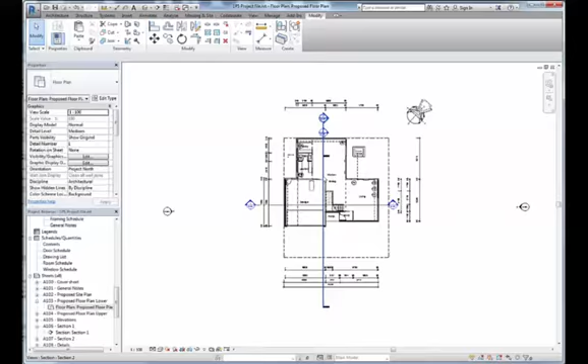Okay, just getting started on sections. I've already made a start, but I'll just run through it.

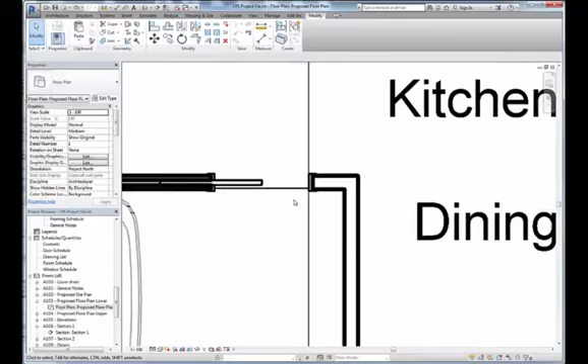You can see where we've got section 1 cut through here, running all the way through the stairwell, through the garage, so we can see this wall. There's a box gutter here, right through to the other end, and I've just skimmed right through that cavity sliding door there and through the garage, just cut through that area as well.

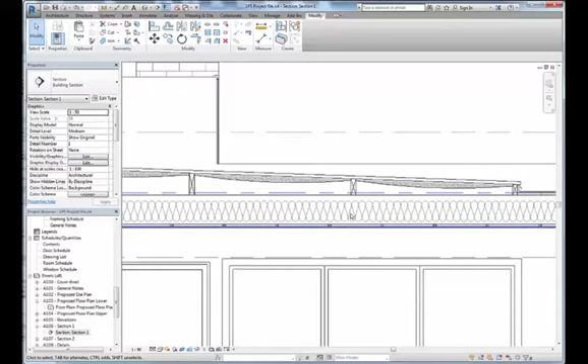So section 1, I've started some detailing here. I'll just switch that back to a thin line. Just started putting all these bits and pieces in. You can see here, it's probably easier to see the stuff in closer detail in the actual detail, so we'll go there in a moment.

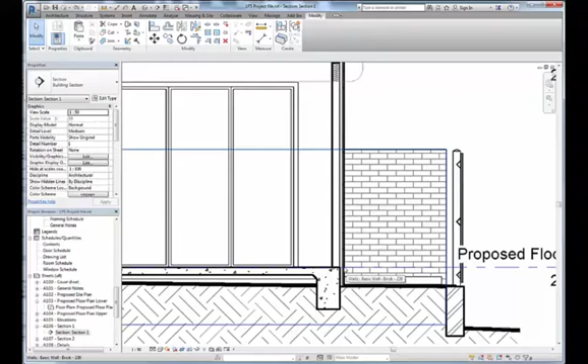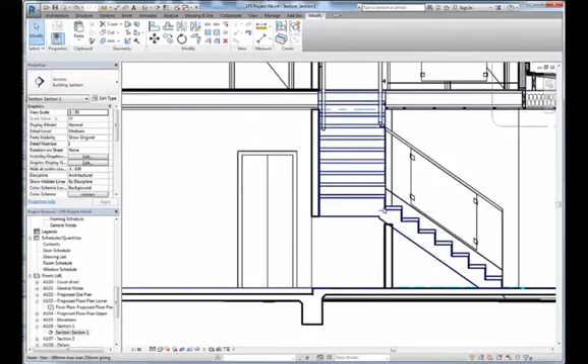I've just started mapping things, cutting and pasting backwards and forwards between my detail and my section. So I would put my bottom plate, my nogging, my top plate, top of the parapet wall, start mapping all these bits and pieces. Rafter, the insulation, some extra lines and bits and pieces going on in the floor joists.

There's another wall, so it'll need plates, insulation, all of those things. There's another, floor to garage, and the from bedroom down to the garage will need to be insulated as well. There's trusses, box gutters. So these are all just detail items, and just using detail lines to go all the way through. I'll just tag that

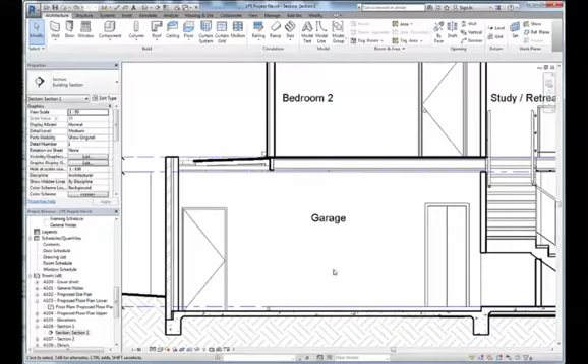room. Create similar. There it is. Just tagging the area. So it's just about drawing all that information in and starting to do the documentation as we spoke of in the presentation.

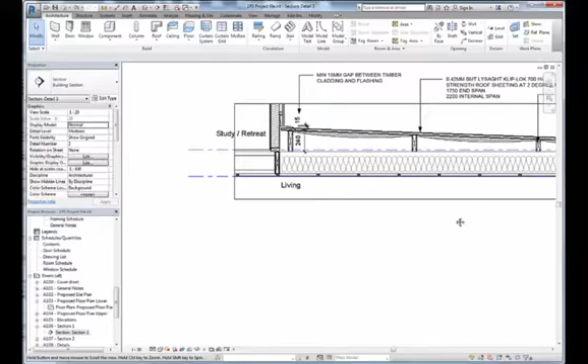So just having a quick look at the detail. I've started putting this together. Probably the best option I can come up with as a quick fix for this roof sitting over the living area is to put the rafters in flat.

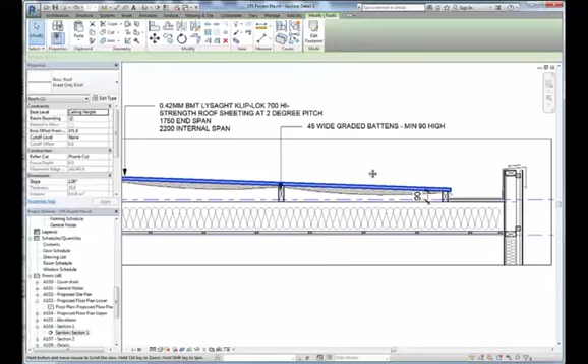Purely horizontal, and then the slope of the roof will be determined by what we call graded battens. So the first batten across the top here is sitting at 90mm, and then we just increase the size of each of these battens over the top to create the fall.

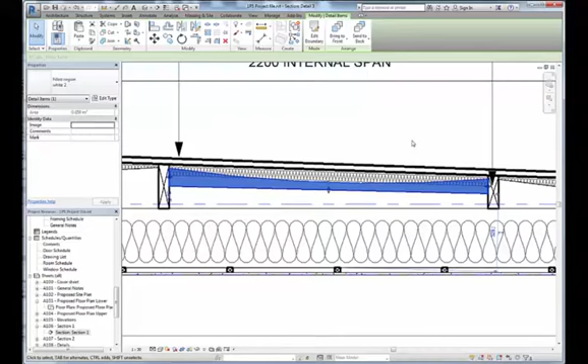The sloping insulation graphic that I've got happening there, you can see that it's just a piece of 40mm wide insulation with a little bit of solid white filled region representing the curve arc of the sarking. It's like an anticon, which is an insulated sarking, and you can see there that it actually hangs over into

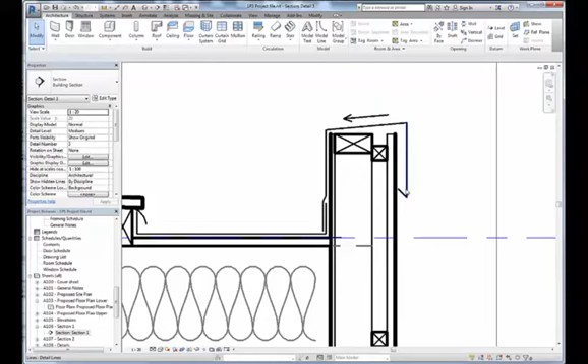the box gutter. We've got the gutter board sitting underneath. We've got flashings going over. You can see that the flashing slopes inwards, so when it's raining and it's wet, the dribbles and the moisture then travel down into the box gutter, and very importantly I've got that drip on that flashing as well, so any water that runs down doesn't proceed to dribble down the wall and leave stains, things like that. We try to put a hefty flashing on so that it doesn't dribble.

I've added these battens. I've used some invisible lines using modify and line work. There should be an invisible line option here if you want to hide different lines in different places. If they're modelled in place, you need to hide a line, then we can use the invisible lines to get rid of those lines. So I'll just undo that so it doesn't mess with me too much.

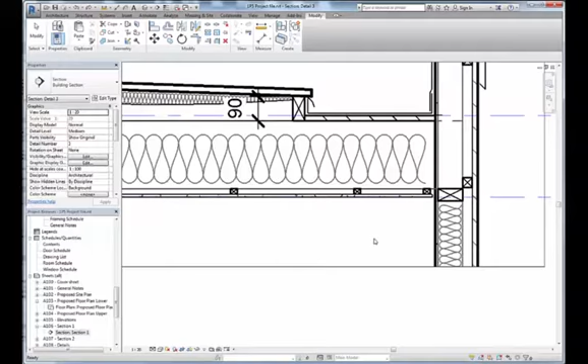So I'm just pulling this apart and I'm just copying backwards and forwards between the section and the details. It's probably need to keep going with the section first before we go anywhere. Draw those rafters in place.

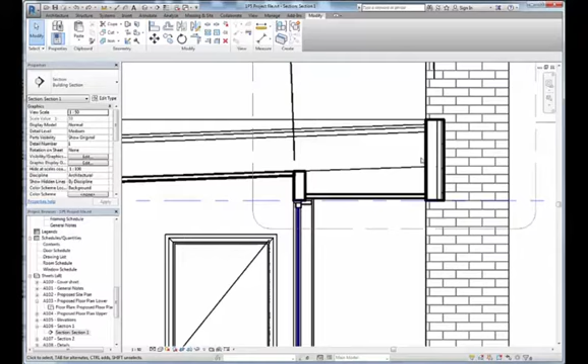This little fascia out here will be top plate, bottom plate, studs in there, some battens so that we can put our cladding on there. We've got eave linings probably going to be supported from that rafter. We've got a lintel sitting in here, hopefully it'll fit in that space, and battens underneath.

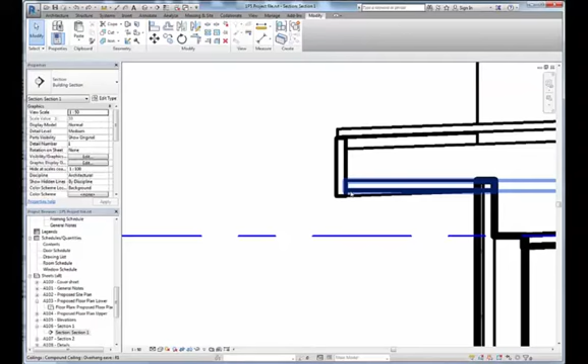Top plate, bottom plate, nogging, top plate, bottom plate, nogging, insulation, battens for the cladding, notations all the way around. We need a gutter on here, and the fascia and the eave linings needs to be noted, so notations all the way through.

You can notate the parapet wall behind or something like that. So lots to do, lots to specify and draw. So I hope that helps just to get started.

As we saw in the previous video, how I created these views here is purely just by drawing up this section, all the details in there as we discussed. In the section I will then duplicate with detail, and with the crop view turned on we shrink it down. This is how we can create our views

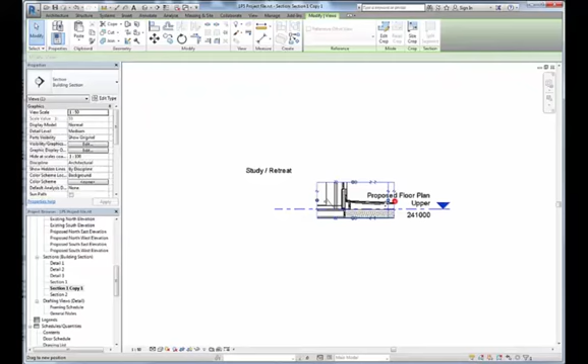for detailing. So if we need to pull out a detail of that area there, we can do that. Change the scale 1 to 10 if it's going to be a particularly big one. Save it as a different name, and then that becomes the detail drawing, which inherits all of the drawn items in there. These are just detail lines and filled regions and bits and pieces.

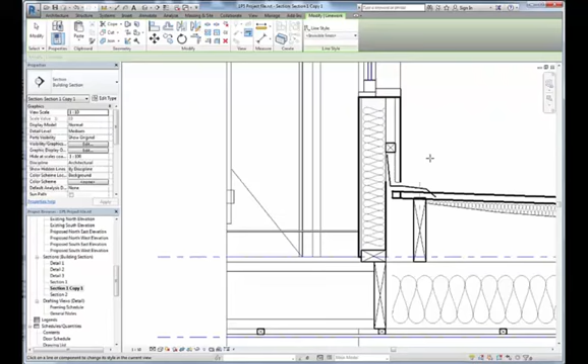I've lost some of the editing, so I've used some invisible lines here, let's cancel that. Line work, invisible lines on the bottom of where this wall sits, just so that we can see where the flashing is sitting. The roof didn't quite go long enough, so I've just hit that with the invisible line and drew some additional lines on there. They were 0.35 pen, just to extend the roof to show exactly where I want it to sit.

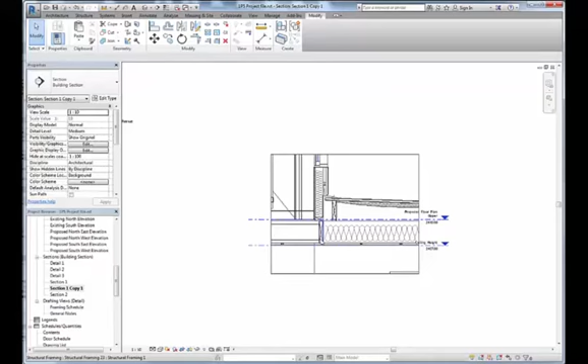I'm not going to alter the modelling of that, just going to indicate it like that so that it's clear. Yeah, so that's how we put all that together.

That generates these little call-outs for us as we need, but don't need that one obviously, so I'll delete that one. But we do need these other two, and as you drag them onto sheets, the little bubble will populate. Sections. Let's get started.